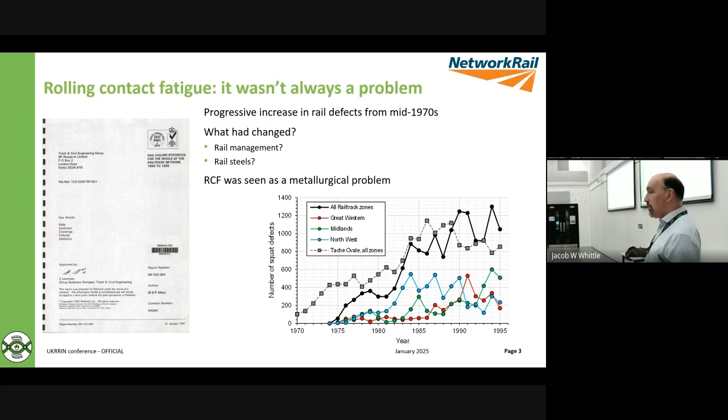And then in October 2000, a train derailed at Hatfield in Hertfordshire - the London King's Cross midday service from King's Cross to Leeds derailed as a result of a rail break from rolling contact fatigue that occurred underneath the train as it was passing around a curve at Hatfield.

Height of privatisation, very much big divisions between wheel and rail. There were also lots of management problems because of the contractual arrangements, but largely the findings were that there was not a holistic view of the railway, and that the wheel and rail interface was seen to be two completely separate aspects - the wheel side and the rail side - and they didn't talk to each other.

And it always comes back to this famous quote from Sir Peter Parker, who was chairman of the BR board from 1976 to 1983, that the railway always falls down at its interfaces. Think about it, it's true.

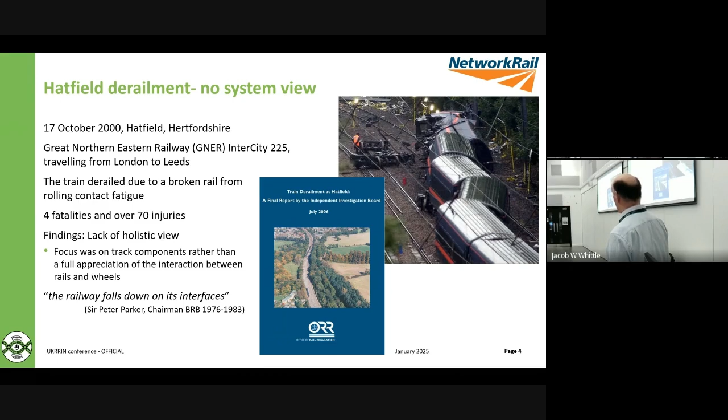So from then on, there was a lot more focus in rolling contact fatigue research. That's one of the reasons why I was able to leave academia and walk into a job with a consultancy, because we were doing research into this sort of area.

Fracture mechanics expert, that's just what we need, we'll walk into this. And I spent a lot of time getting involved with these sort of cracks, looking out, walking out, taking photos, walking track in the days when access to track was much easier. So very often you're getting these surface initiated cracks, which then risk growing down through the head of the rail, like Steve was talking about yesterday.

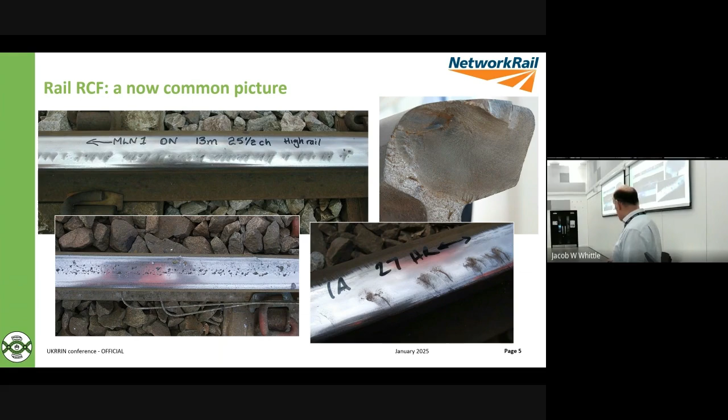We've still got RCF, we've still got a lot of it. Back into silo thinking - we do a lot about managing RCF, but I don't think we do enough about prevention of it. So we've got lots of management techniques to monitor it.

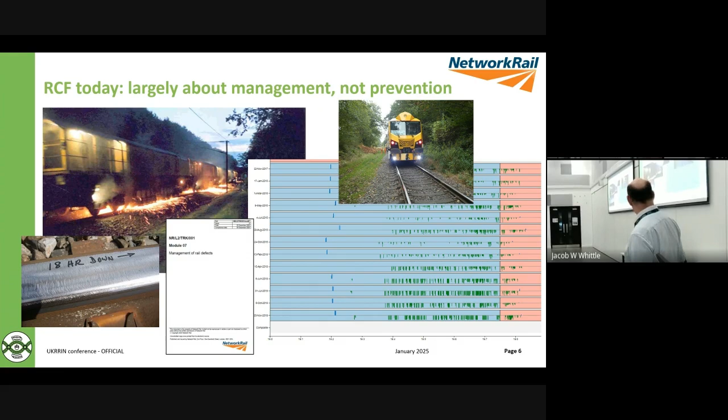Going back in time, BR's interest in the RCF problem, or rail breaks, had really been looking at the Tache Ovale problem. A Tache Ovale is an inclusion within the head of the rail from which a crack will grow, which is slightly different from the surface-initiated cracks, which is most RCF these days.

When I started to get involved in this, in 2001, RCF was relatively little understood. Modelling was dominated by the vertical forces being imposed on it, so there was a lot of focus on the contact stress between the wheel and the rail.

There were lots of theories and laboratory studies, and I know there's people in this room who are actually involved in a lot of that. There was a lot of modelling and laboratory studies, theories around what caused it, and they worked. There were pretty good theories, they worked in the laboratory, but they weren't able to explain the way that RCF actually appeared in the field, the way that cracks appeared in clusters on a piece of track.

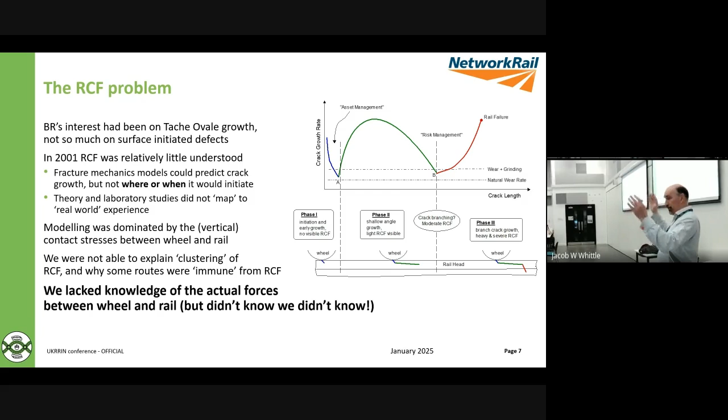You could go down a piece of track and on a straight piece of track you'd find a cluster of cracks here, then nothing, and a cluster over here, and then nothing, and a cluster over here. These theories weren't really able to explain that.

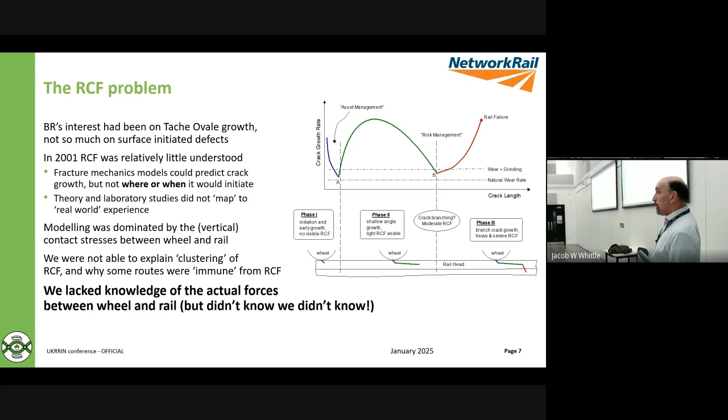So we really lacked the knowledge about what was actually going into the rail, the forces, and the mechanism of what was going on.

One of the first things I was involved in this area was actually two areas of modelling. One was crack growth modelling. A lot of work had been done to determine crack growth rates in steels.

That gave us one management method, which was you could work out how much material you needed to grind off the rail to actually curtail the crack. I think Steve mentioned that yesterday.

But the real problem came back to cracks initiating. Isn't it better if we could actually stop them appearing in the first place, rather than trying to manage them after we've got them?

The best that we could do with the data that was available was build a statistical model. So we had what was then classified as big data - you'd look at it now and say this is very small data. This was a database, call it a database, it was an Excel spreadsheet, compiled by track engineers.

It was compiled across every Railtrack zone as it was at the time, who said exactly which curves had RCF and how severely RCF was on those curves. We got hold of that database, and that was our first look at big data.

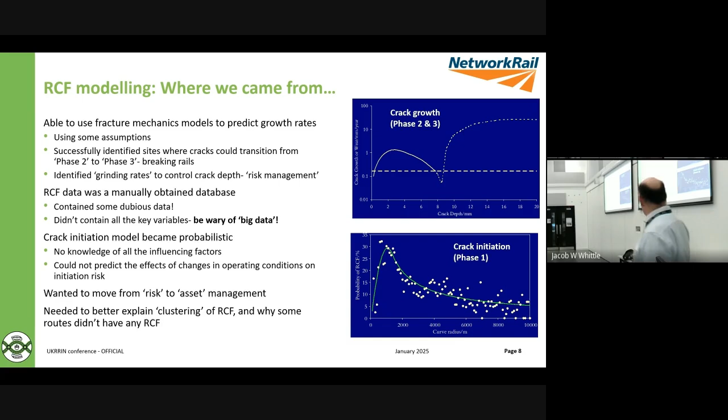So the next step was then to say, actually, we do need to better understand the forces that are going into the wheel and rail. So we moved away from this big data, what we refer to as a macro approach, trying to fit fracture mechanics theories to the whole of the network, and said, let's just look at a very small part of the network and understand that and analyze that to death in very great detail.

So we found a number of sections of track. Each was probably about, the one that this was taken from is like 500 meters of track, probably at most, and took a much more detailed approach. So effectively, we're looking at a much smaller set from that big data, but being able to get a lot more information about that small set and analyze that.

So we went out, we did track surveys in the days when we could go out and do track surveys. We measured the positions of the cracks. We measured how long the surface length of the cracks were, how far they were away from the gauge corner, and how far they extended up onto the crown of the rail, the angle at which they're positioned on the head of the rail.

We collected data about the track alignment and the track geometry. We knew exactly what the curvature was, the cross level, and how that varied at each bearer or each sleeper through the site. We measured rail profiles. We needed to actually understand the forces, so we needed to understand what the rail shape of the rail was.

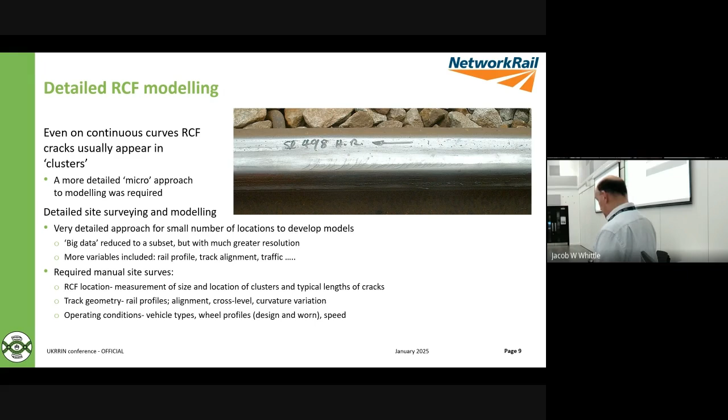And so we employed all that data, stuck that into a vehicle dynamics simulation of all the different vehicles. So there were lots of simulations to do, one for each vehicle type, one for each wheel profile we did. Output was all the forces that we thought we might need to look at, and then we could test hypotheses of different fatigue models against what we actually saw on track.

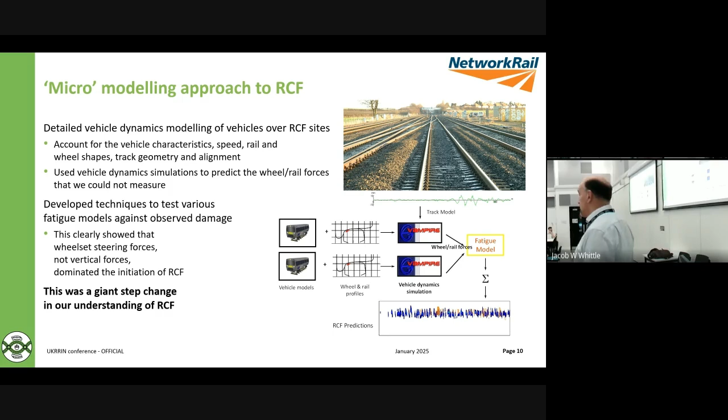And this was really a giant step forward in actually being able to understand RCF. So it's about taking a small subset of data, but knowing absolutely everything there is to know about it.

So we go back then and say, right, okay, we've got this data, we've got the simulations, we know how the forces vary. Let's put that into our classical rolling contact fatigue models. So this is using shakedown theory, the stuff that had been proved to work in the laboratory and theoretically was right. But when you put that out in the field, it doesn't give you a good prediction at all.

The black boxes you can see, so each of you've got, if you like, a plan view of the left rail and the right rail. The blue and the green coloured contours is where the model is predicting you should get RCF. And in the rail, there's little black boxes which show you where the cracks were actually seen, and they're also mapped out on the picture of the switch and crossing at the top right.

So the model is picking up how the contact patch is moving over the rail, but in this case, this model is giving a very poor prediction of what's actually happening in reality.

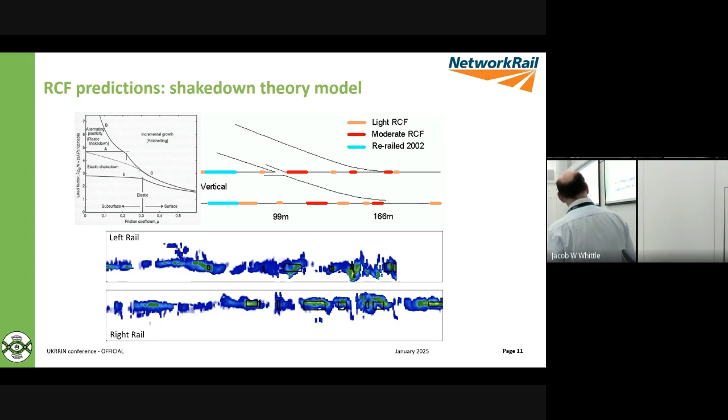So we needed to go back, and we needed to then be able to generate a new hypothesis or test other damage models. And this is when we started to look at, and again, Steve mentioned it yesterday, a parameter that was referred to usually as T gamma, and it's basically the frictional energy which is being dissipated in the contact patch as a wheel rolls along the rail. So that energy is being dissipated in the rail, and it's going to be doing incremental fatigue damage to the material right at the surface of the rail.

And you develop the model based on that, and suddenly you get the predictions in the bottom right-hand corner, and suddenly you're spot on, and you get very good predictions of where the RCF is going to be, even down to the severity of it as well.

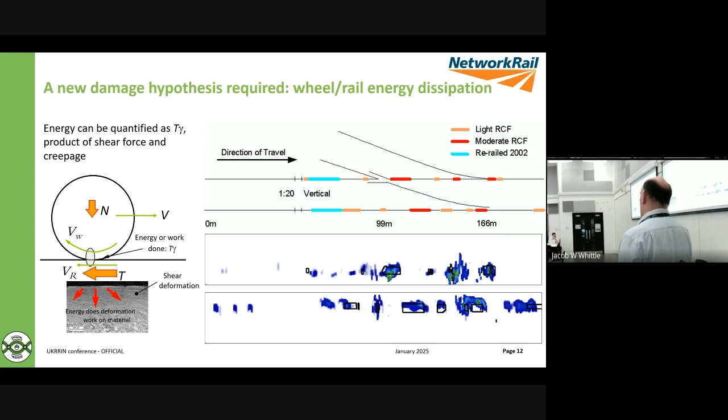So this was an amazing step forward in actually our understanding of RCF, but it was achieved by looking in great detail at a small subset of data rather than the whole network.

So then you can step back from that and say, how can we use this model? And you can start doing parameter studies and understanding what the influencing factors are for the things causing RCF. And one of the biggest things we found is that it's actually the vehicle design.

It's nothing to do with metallurgists, it's nothing to do with the materials causing the RCF. It's actually the design of the vehicle and the way that vehicle design had changed over the years, and an increase in the primary yaw stiffness, so the actual suspension design and the stiffness of the components within the bogie level.

The suspension at the bogie level within the vehicle, how that had progressed over time, had actually unknowingly increased the forces that we were imposing on the rail, which was actually causing the fatigue damage.

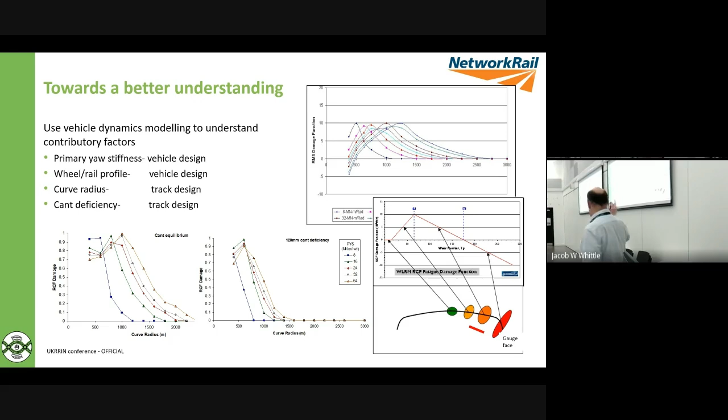There are other factors as well. Wheel and rail profiles themselves have an impact. The curve radius and the cant deficiency also play a part, but that tends to be a lesser factor than the actual vehicle design itself. But we were only able to determine these once we'd done all the detailed modelling to start with.

It was also helpful to explain why on the Southern route, particularly the southwestern part of Southern, they'd had a sudden increase from 2005 in the number of defects that needed immediate attention, and they were growing very fast. On that particular route, they'd had a sudden change from old 1950s EMUs—the whole fleet had been replaced almost overnight by wonderful new Siemens trains.

Which we were able to show was actually quickly the cause of the increase in damage. But at the time, as an infrastructure manager, you're going, well, what have we done differently? Is it the poor track maintenance engineer who suddenly isn't doing his job? Is he not managing the railway in the same way? But actually, it's nothing to do with the competence of the TME. It's just down to the traffic and how that changed.

So it really increased our understanding of the forces imposed between the wheel and the rail. And it's not the vertical forces, it's the tangential forces—the actual forces in the plane of the rail which are steering the wheels around the track. And the stiffer you make the suspension, the bigger those forces have to be to actually guide the vehicle around the track.

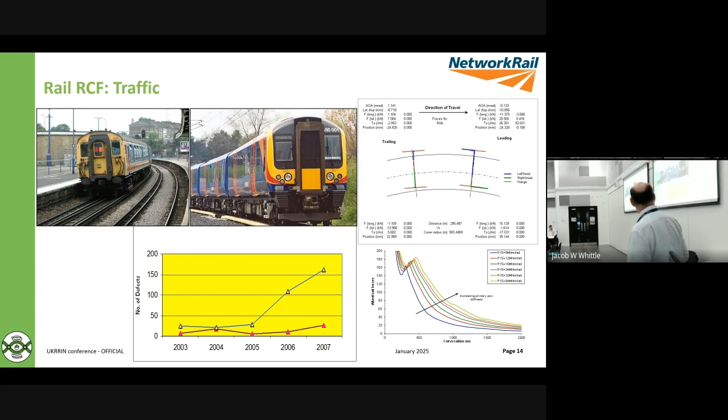But the advantage is that once you've got that detailed knowledge, you can take a step back and look at the wider view, and you can start simplifying it and working out what things you don't need anymore. So we generated something that was first known as the simplified model. Basically, we just looked at the quasi-static behavior of the vehicle and said, can that tell us anything about what's going on?

And we applied that to our big data set that we started with, the RCF database, that big spreadsheet we had. And suddenly, this model could explain 80% of the RCF that we were getting on the whole of the network. And it told us exactly why we were getting it where we were. That was amazing, but we were only able to do that after we'd stepped back from taking a detailed view of what was going on.

Let's go back. A colleague of mine I did a lot of work with used to refer to this model as the Timex model. He used to say that the fully detailed thing was like telling the time with a Rolex—it was really accurate, spot on, but for everyday use you wouldn't want to wear it. You just want to go out with your Timex because you didn't want to break it. But this was the Timex model.

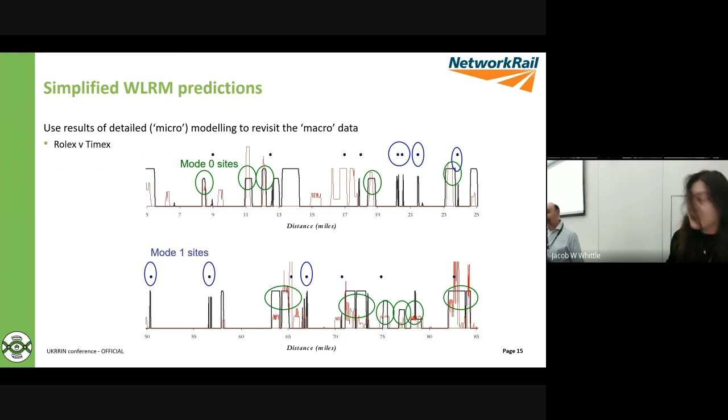I didn't touch anything, promise. Oh, God. Talk amongst yourselves. It's still on this little screen. It's not picking up this computer now. Oh, here we go. Let's come back. Turn it off now. Yeah, thank you.

Yeah, so actually there is a place for the Timex model. It's simplified, but it's good enough in a lot of cases.

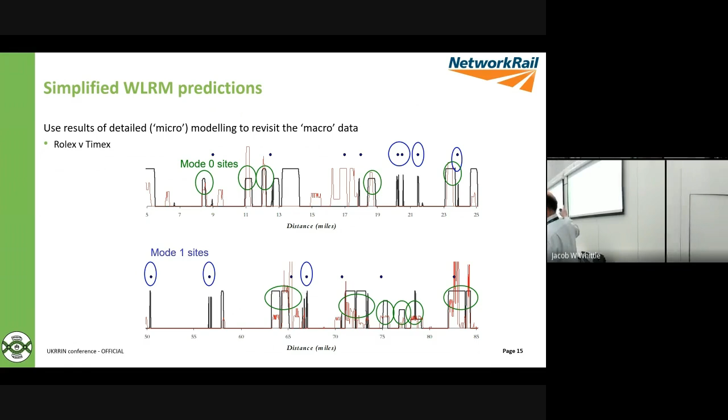That's led us as an industry to use that understanding and research to actually influence the industry and what we do. The first thing we do is make the factors which cause RCF a contribution to the track access charges paid by train operators. Every train operator has to pay an access charge to operate on a piece of network, and we say if your vehicle's got a stiffer suspension, you need to pay more than one with a softer suspension, because you're going to do more wear and tear on the network.

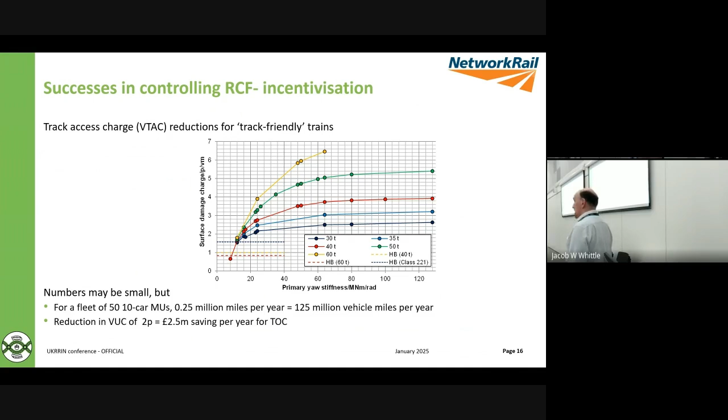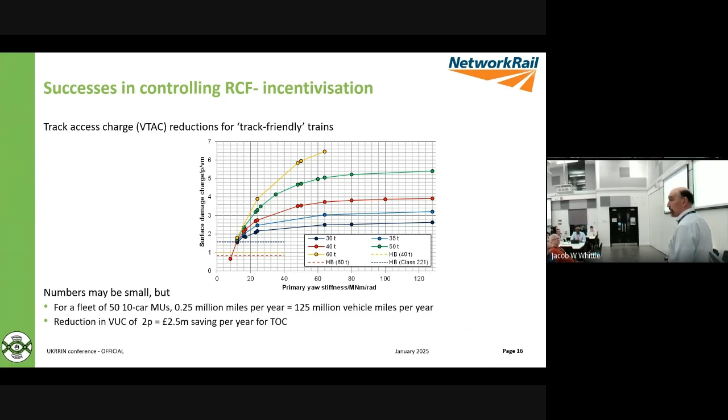It's a bit of an incentive for people to buy vehicles with nicer suspensions. Doesn't always work, but if you're an operator with a fleet of 50 ten-car EMUs and you save yourself a few pence on each vehicle, you're saving millions over a year in operating costs. It may not be a big driver for people buying vehicles, but it is for people operating them.

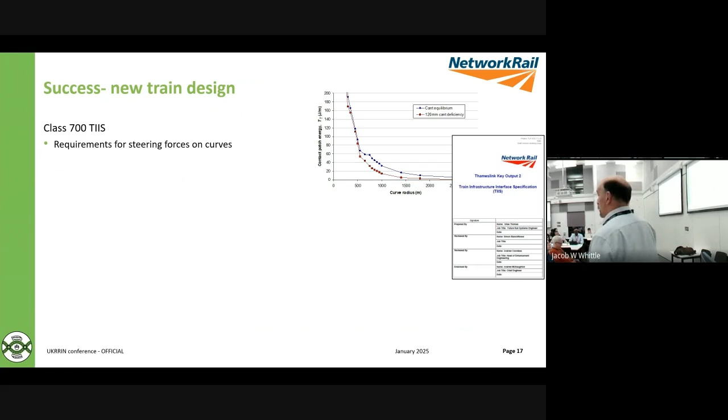We've also done quite a lot with new train designs. We've been involved in writing train infrastructure interface specifications, so we're able to tell manufacturers, if you want to operate your train on our network, this is how it needs to behave. An example here is the Class 700. The requirement was quite stiff because we knew the vehicle had to go around some very tight radius curves. We put in tight constraints, but Siemens were able to deliver a much improved bogie compared to previous vehicles.

You've got an inside frame bogie now, which makes the whole bogie lighter, reducing the forces on the infrastructure. Less unsprung mass, softer yaw suspension - it ticks all the boxes we wanted.

The advantage is that once they've designed and built that, it becomes the default offering for any other trains you buy. That bogie gets used in the 707 and 717 fleets and starts to go everywhere. Similar story with the 345s on Crossrail - tight specification, but if you look at any suburban Bombardier train, now Alstom, you'll find they've got pretty much the same bogies.

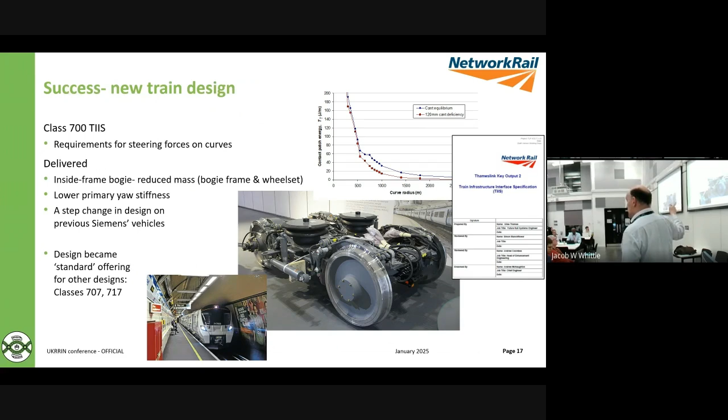So that's a success of actually trying to turn research into something we can influence in the train world better.

We've also got developments like this hydrodynamic bush, which has a variable stiffness. On straight track at high speed, it gives you a very stiff characteristic, which helps keep the ride good. But on tight radius curves, the characteristics of the bush become very soft, so it's got very nice curving performance with low forces.

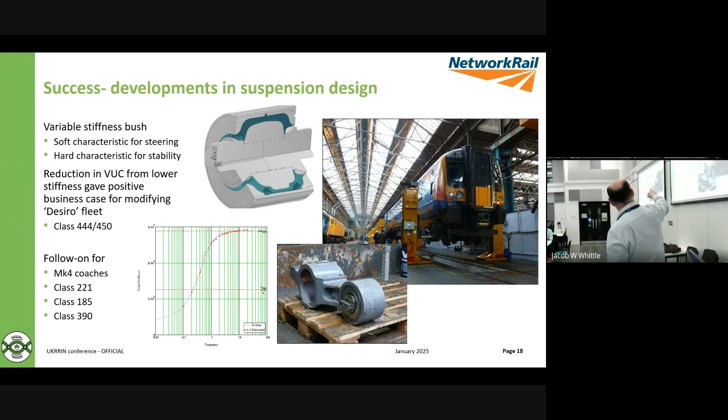And again, that's now been rolled out on a number of fleets across the network.

Understanding the contribution of the steering forces, and how they're influenced by the wheel and rail profiles, has allowed us to improve the rail profile we tell our grinders to implement. Whether they actually implement it, I'm not entirely sure, because it's quite difficult to achieve. But it certainly means there are new wheel profiles available for train operators, which maintain the curving performance people want from the vehicle, but reduce the forces acting at the wheel and rail.

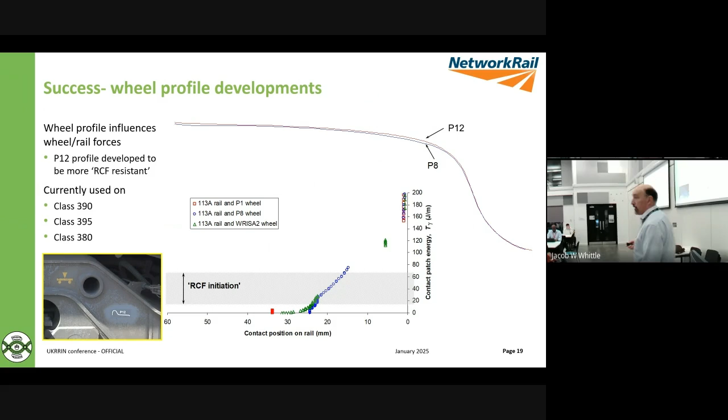The science of vehicle dynamics allowed us to improve and better understand how vehicles were behaving, to design them better, to understand the mechanisms by which they derailed, and build better resistance to derailment. We're now at the stage where the number of derailments we get is in the handful per year on running lines. We still can't get away from people pulling hand points underneath trains in yards, depots and sidings, but on running lines we're operating a much safer railway, and that's a direct result of the understanding we've had in railway vehicle dynamics.

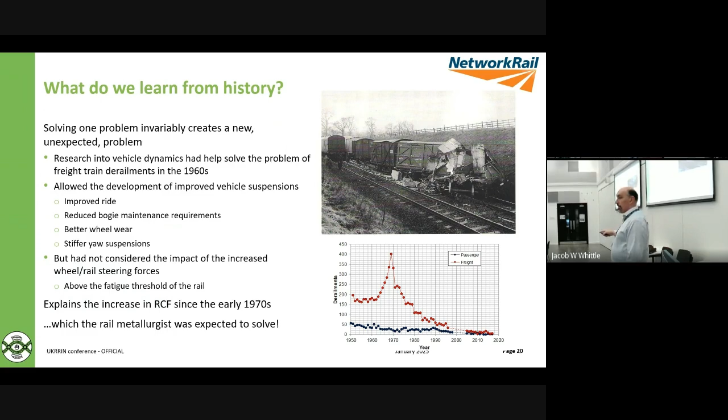But that understanding allowed us to change vehicle design, which unknowingly increased the forces at the wheel-rail interface, which then led to the generation of RCF.

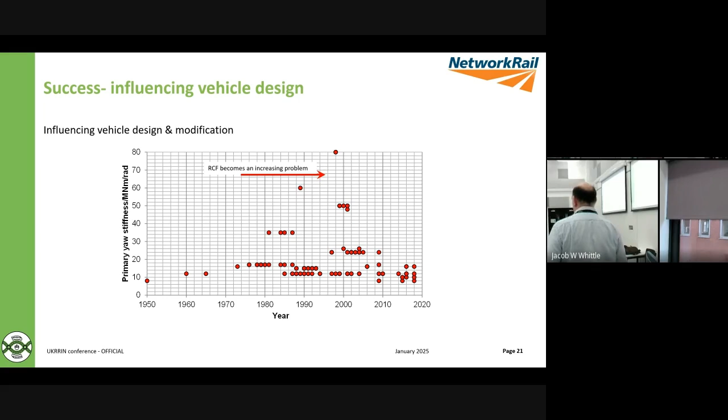So if we look at it, this graph interestingly shows how that primary yaw stiffness, the actual bogie design, how suspension systems got stiffer over the years. The year along the bottom there, each dot is the year of manufacture of a different type of train. And you can see from the 1960s through the 1970s, we have a steady increase in the yaw stiffness, the manufacturer's tendency to have higher stiffness.

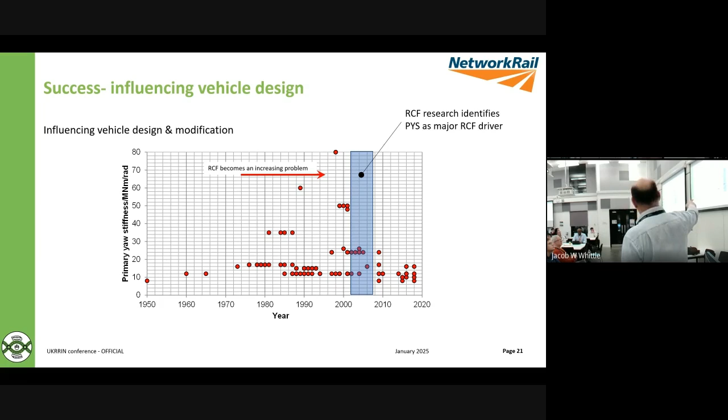We look at the years that we were active in doing rolling contact fatigue research and starting to influence the industry, and we suddenly find that beyond then, people are starting to acknowledge that, and yaw stiffness is starting to come back down again. So again, another big win for us.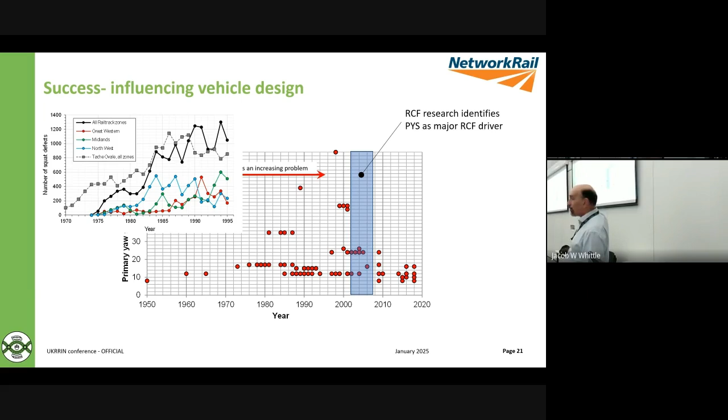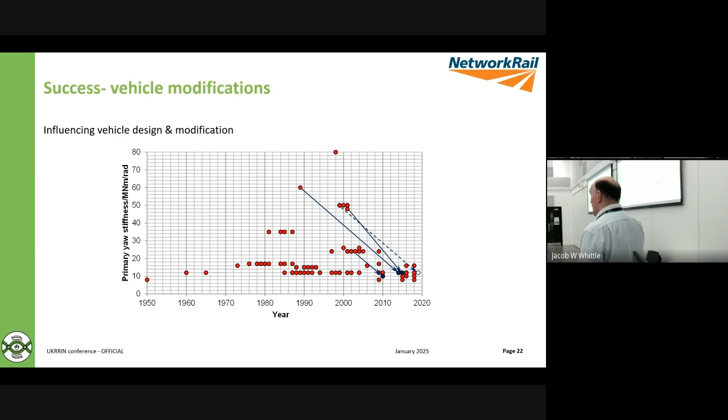You compare that with the first graph that I showed, which shows the number of defects that we're getting per year, and you can see there's a direct correlation between the growth in that curve and the change we've got in yaw stiffness. We've also been able to influence those vehicles which have been modified with softer suspensions, with understanding what's going on. So benefits to the train operators in reducing track access charge, less wear and tear to our infrastructure, making it more reliable.

But my concern has been that some of the vehicles are starting to get stiff again, so people are starting to forget the lessons that have been learned. These are two fleets of vehicles, and in the last couple of years, I've been contacted by the operators of both these fleets of vehicles to say, we've got RCF on our wheels, can you help us?

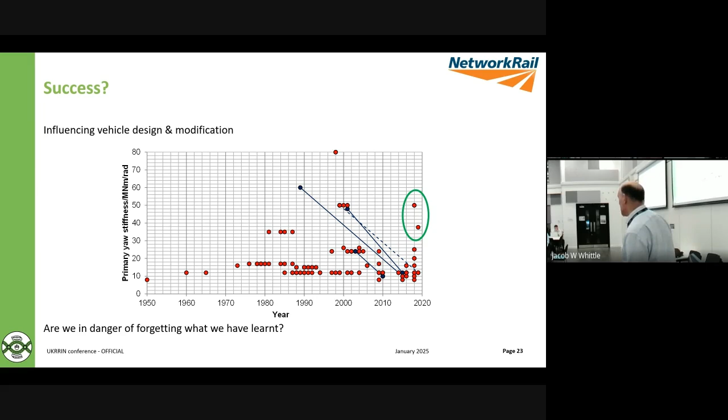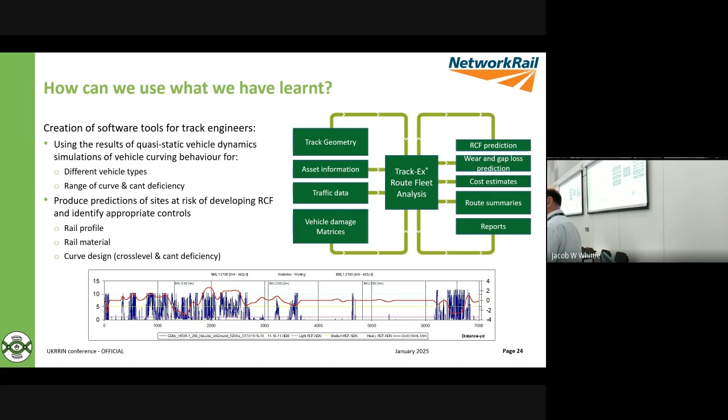So that's really about RCF. This is about that simplified model, which is now implemented in a much more detailed way for our track engineers. So we've got a tool now referred to as Track-Ex, which allows track engineers to be able to assess where they're going to get rolling contact fatigue, but without having to do all the detailed vehicle dynamics simulation.

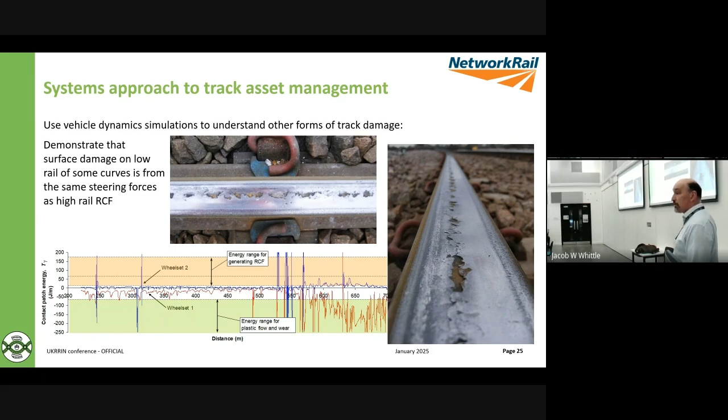I think my job is really to take a systems approach to track asset management. So we've done a lot of research looking at other forms of rail defects. This is a form of rolling contact fatigue that occurs on the low rail of tight radius curves. Done a lot of research using the same sort of principles, but we can better understand what's causing this. Until we did that, track engineers really didn't know what was causing that. It doesn't look like it's rolling contact fatigue, but we can show that it's caused by the same forces.

We can also apply those to do more fundamental research. So we can actually look at things like how vehicles respond to different wavelengths of features in the track. If you imagine say a lateral alignment feature in the track, when the vehicle sees that, it actually sees it as if it's going into a curve. So it'll start generating the forces that it would as it goes into a curve. Therefore, we're going to start to get damage and deterioration from those increased forces. And so we've done some research to understand how vehicles respond to different track features.

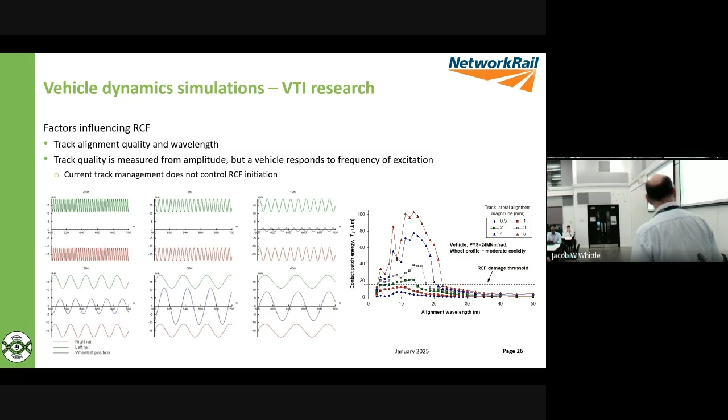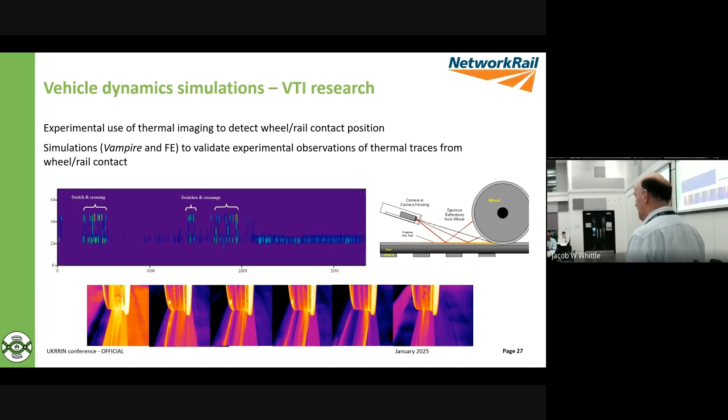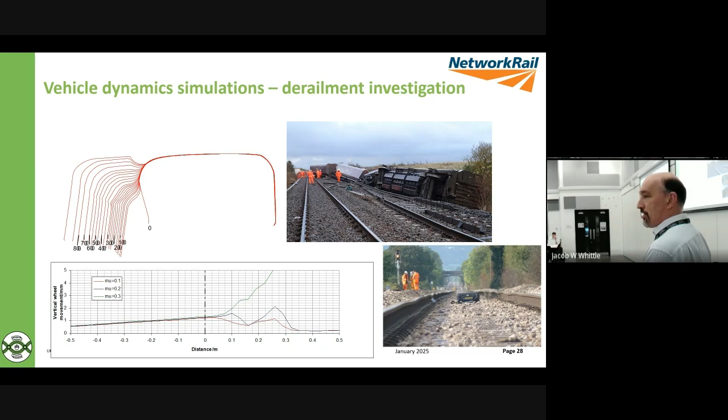We use it a lot for incident investigation, so derailment investigation. We do a lot of simulations to help understand what the mechanism of a derailment was or why a particular vehicle in the train had derailed. The 14th vehicle in a freight train derails. Okay, you might find a track defect, but you've got to ask yourself, well, why didn't it affect the first 13? So it's very useful for that.

I refer to this as bringing some science to track engineering. I know we've got at least one track engineer in the room.

Track engineering is very often seen as, or hit it and see what happens. It's quite basic, not a lot of science in it.

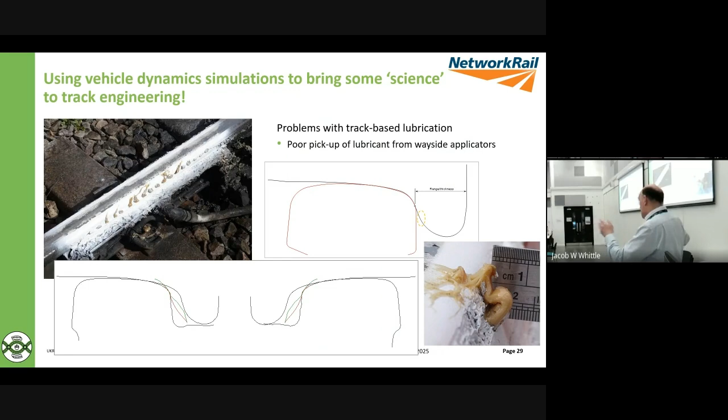This is a problem we had with lubrication, in that we had some greasers installed on the rail, but the trains weren't picking up very well and just spraying grease everywhere. So after the passage of the train, you would find that the little blobs of grease had not been picked up at all by the train and just splashed along the head of the rail. So some vehicle dynamics studies were actually able to show how the wheels actually moved as they approached that grease applicator and whether or not they could pick it up, with some recommendations about what we should do in the future.

And then there's passenger ride. So we're getting further away from the wheel rail interface, but it's still important and it's still a factor from the wheel rail interface. So this is a design of a switch and crossing. It's installed and it's maintained to design, but people started to complain about poor ride over it. Track engineer goes out, does a track survey, says I can't find anything wrong with it, it looks fine to me. It's as it was designed and as it's installed, absolutely fine.

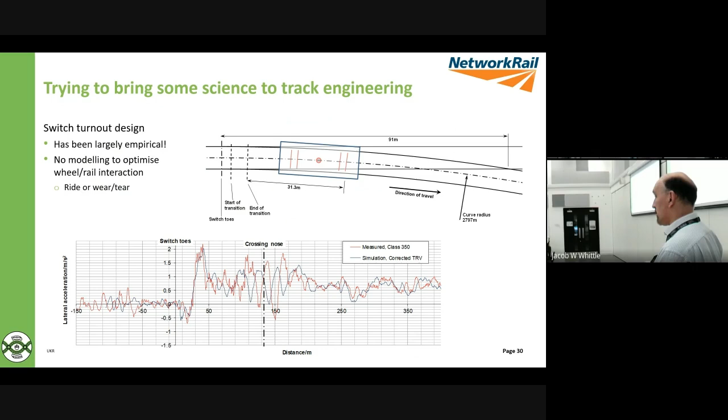Do the vehicle dynamics simulation, and you find that actually when the vehicle gets from the toe of the switch, because of the design of the crossing, the vehicle actually gets a big kick, which turns itself into a jolt that the passengers feel and report bad comfort. So there's stuff wrong with the design, but basically it's been built as it's designed. So it's not the track engineer's fault, but it basically means you need to have a fundamental think about how you design switches and crossings to overcome problems like this because of the poor ride you're getting.

Another problem is adjustment switches. So where we've got expansion joints or adjustment switches, again, I was invited to investigate some problems that we had with batter and the damage on the head of the adjustment switch. And actually, when you look at the design of the switch, the changes in the rail profile that the manufacturer puts in, again, according to the drawing that they're supplied with to manufacture it, you find that it's not good for the passage of the contact patch.

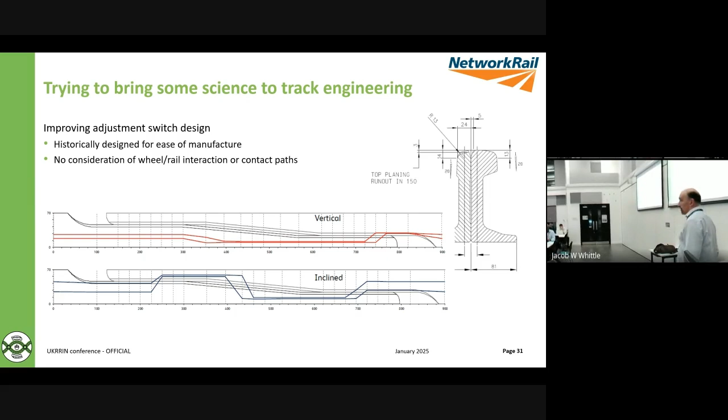The red lines on the top one there show where the contact patch is predicted to go as it runs through the switch. And actually, they take it to run on the very narrow part of the rail, on the tongue of the rail, rather than transfer the contact onto the much wider rail that it should be transitioning into. That's just because of the manufacturer's drawing, which was put together without thinking about the vehicle dynamics. It was put together from a manufacturer's point of view for something that they could easily manufacture. There was no consideration of how vehicles would actually behave and what would happen to the contact patch when it went over the lap.

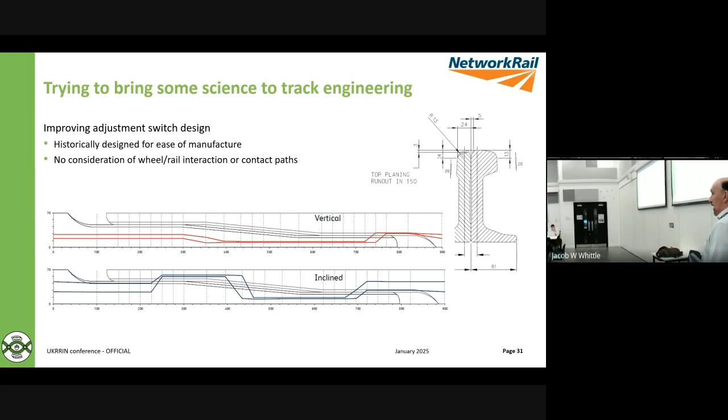So what does the future hold? There's clearly lots of problems which are always coming out about vehicle track interaction issues. There's still lots to do. For me, the big thing is always the system thinking - get away from the silo thinking.

We've got new data streams that are becoming available now. So increased use of aerial surveys - helicopter and drone surveys are becoming much more available now. They're very good at giving you a general overview of what's happening at a particular location, but can't give you the level of detail that you need from a track walk. Things like the eddy current data, I showed that graph earlier. We've clearly got problems with the distance alignment on it, but I think there's a lot that we can start to get from that data.

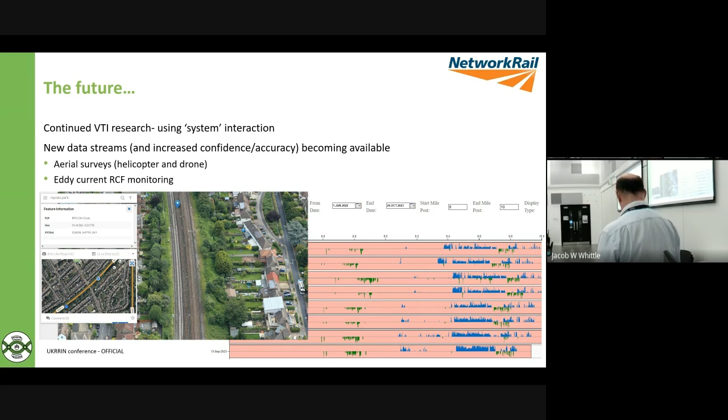There's automated visual inspection systems. These are some screenshots from a system known as AIVR. So it's a set of cameras which are mounted underneath a vehicle - there's like half a dozen cameras underneath it, so you're getting views straight down on each of the rail heads. You're getting also angled views either side, forward and rear facing images, and the quality of the images is very good. You can actually take select different runs at different times and see what's happening.

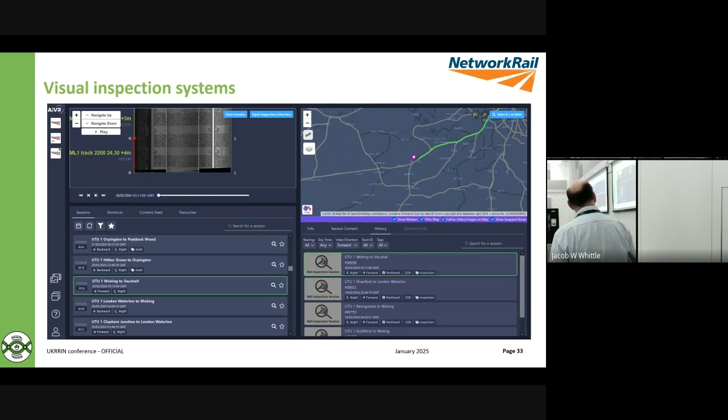What's more, you can train an AI system to actually look for them. What we're starting to find is that the AI system finds a lot more squat defects than we find. It's a lot better—it doesn't get bored looking at pictures, but it sees a lot more than we do. It flags them up, and you look at it closely and go, oh yeah, there is actually a squat there.

So we're actually starting to be able to get a lot of the data that we wanted when we did those detailed track surveys 20 years ago. I did a track walk six months or so ago, and before I went on site, I scrolled through this step by step to see exactly what I wanted to look at in more detail and what measurements I wanted to take, and it was really useful for when I got to site.

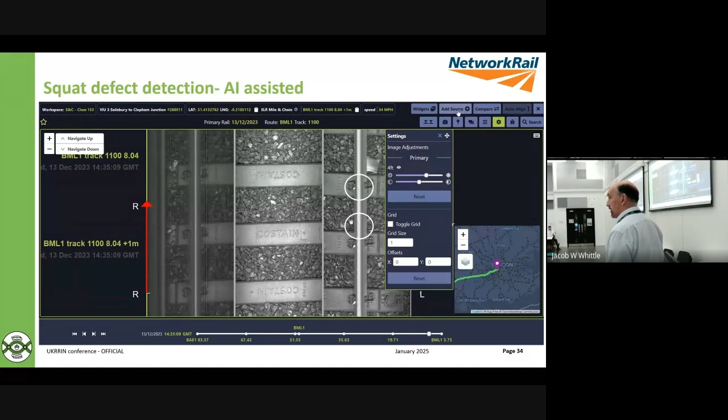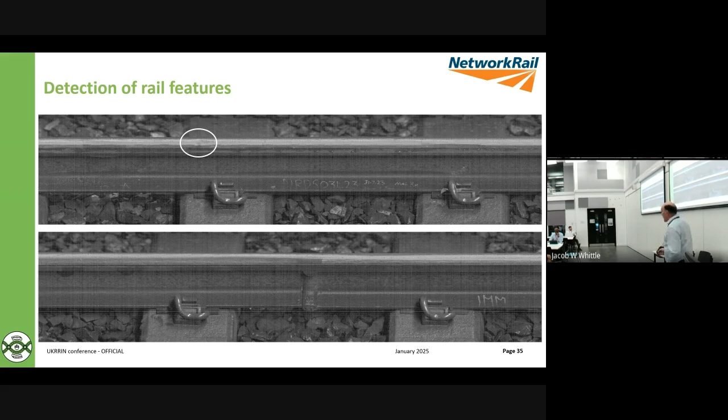But at the moment we still need to go and do those track site visits to be able to collect the rail profile data that we need to put into simulation. And as you can see, with access that's harder and harder to get, those site visits invariably can only be done at night time now. And I'm getting to an age where I don't like being up all night. So roll on improved data.

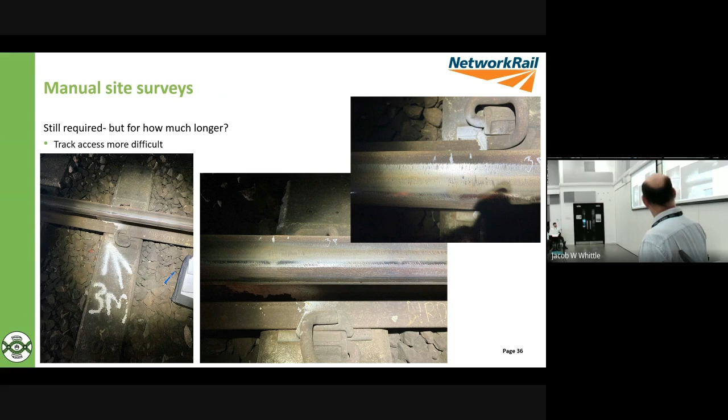Sorry Mark, in the interest of time, just the last slide. Okay, you stop me. But we are getting to the point now where we have got automated systems that can pick up rail profiles from our ultrasonic test trains. We're doing assessments as to how good those profiles are, with what confidence we can use them in simulation.

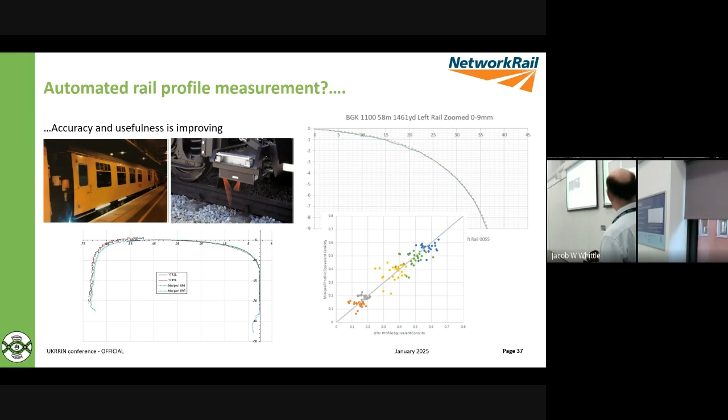But we're getting there, so I am hopeful that we get all the data that we need without that track access. So what of the future? The challenges are that we're getting less access to track, which means two things—less access to do any maintenance or correction. So we've got to do our bit to make vehicles and track more friendly to each other, so there's less need to go in and do maintenance.

New rail materials—I haven't really talked about rail metallurgy, I left that to Steve yesterday. But what can rail metallurgy do? Now that we understand the forces causing RCF and other defects, what can we do to use that to influence rail metallurgy to make it more resistant—without the current approach, where Steve sells us a new bit of rail, we ask how does it perform, and he says it's going to be really good, really good. But we don't really know until you put it in a piece of track and monitor it for a year.

And then you go, actually it's not as good as all that, is it—go back. So it's a bit of a suck it and see. We want to be able to turn that round to say, this is the metallurgy we want because we know it will have better resistance. So that's what Phil's PhD is doing—she's going to tell me to tell Steve what he needs to do, aren't you? Yeah.